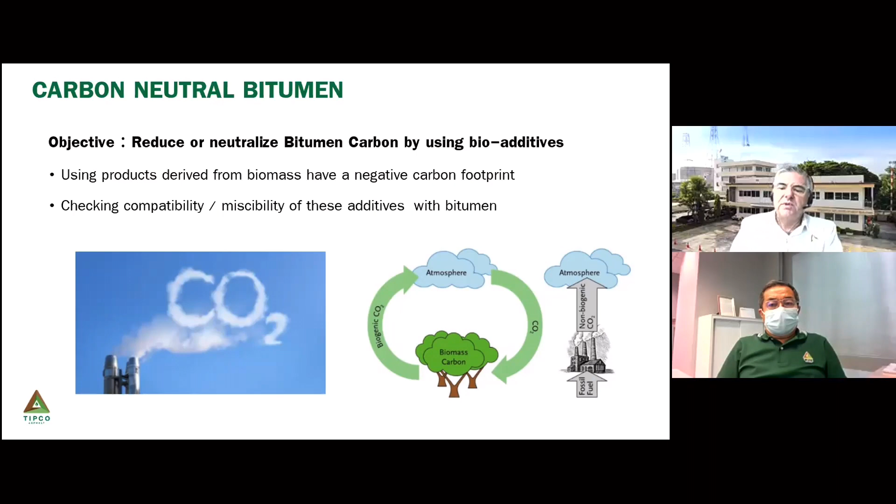So this is clearly an example of what we are looking for now: we know we can measure the carbon footprint of a product in kilograms of CO2 equivalent per ton. We know that after a life cycle analysis, and depending on the crude oil origin, bitumen can have a positive carbon footprint between 150 to 600 GWP.

Bioadditives coming from biomass origin, from tree or from vegetal, have a negative carbon footprint. So by blending these two products, we can neutralize the carbon footprint of the bitumen.

Sorry, there is a microphone open. Thank you. And even if we increase the percentage of the bioadditive, we can have a negative carbon binder.

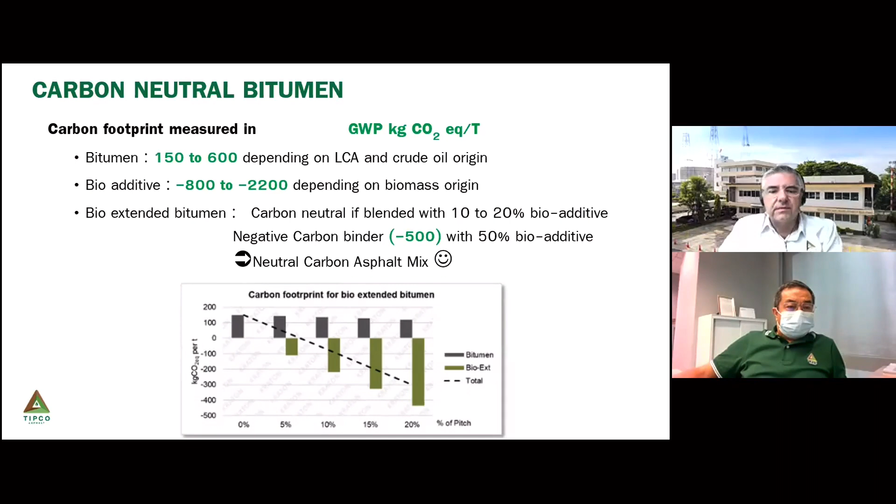This product has already been developed by some companies where we blend normal, or traditional, bitumen from fuel or petrol with some vegetal resin.

Depending on the additive used and depending on the penetration of the base bitumen, if you blend between 10 to 20% of this bioadditive with, for example, a 20-30 pen grade bitumen, you can obtain a 35-50 or 50-70 penetration grade bitumen. And the properties of the bitumen mean that it can work.

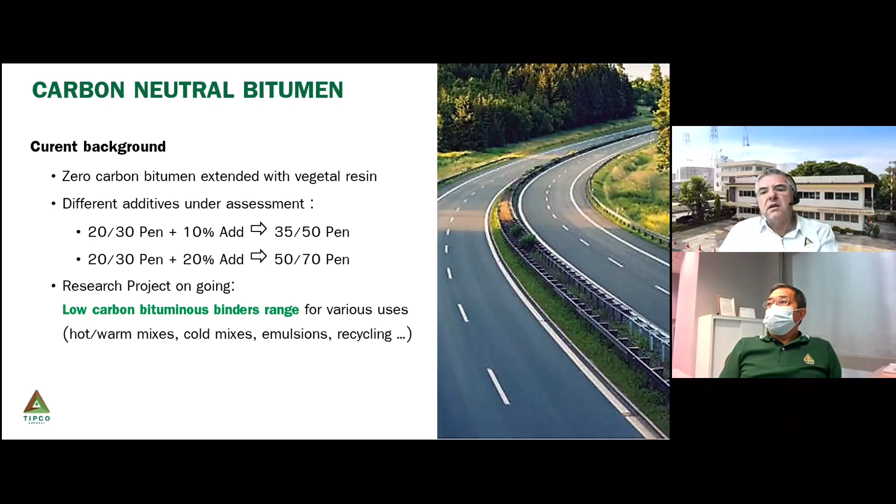Now the research and the next step on this product is to check the real properties of this modifying binder, because when you add this vegetal resin or this product from biomass, you have to check if you meet all the specifications and requirements of bitumen, especially viscosity, properties after aging, and long-term performance. So there is clearly still research ongoing on this product.

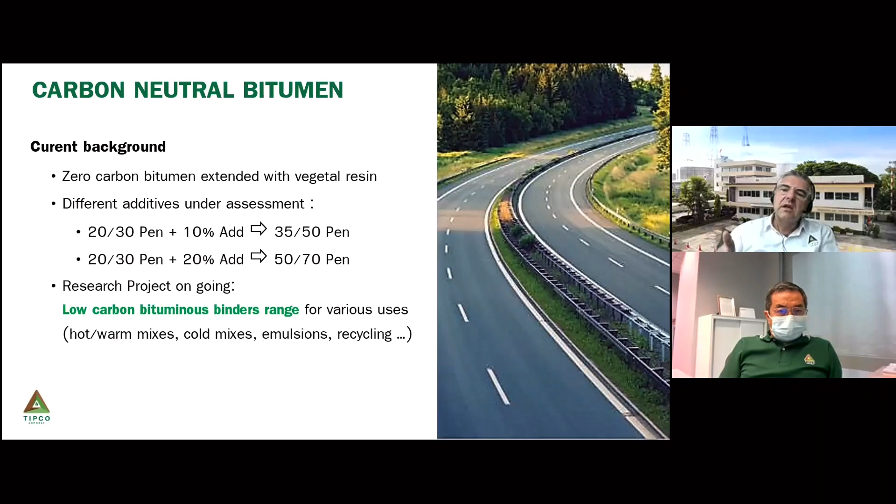And also how we can use this carbon neutral bitumen in all the various uses we have for bitumen, with compatibility with hot or warm mix, with cold mix, emulsions, recycling, etc.

If you push the logic of a zero carbon footprint binder, you can go to the ultimate step: to develop bitumen or binder coming exclusively from plants or from vegetal.

This is what we call biosource binder. This binder is made from raw materials coming exclusively from biomass and not from oil and petroleum. This binder already exists. It has been developed in Europe for many years now.

It acts as a carbon sink. In fact, the carbon footprint of the bitumen is negative because it's made from plants which absorb CO2 from the atmosphere. This binder, what is interesting with this binder, not bitumen, is that it's a clear binder.

You don't have a black component like the asphaltene we have in normal bitumen. It's a translucent binder which can be used to highlight the natural color of aggregates, or it can be used for colored product.

It has to be produced in dedicated plants because you have to blend the recipe, you have to blend some resin, some vegetable oils, some additive to obtain this bio-sourced binder. It can be the equivalent of the bio oil, biopetrol you put in your car.

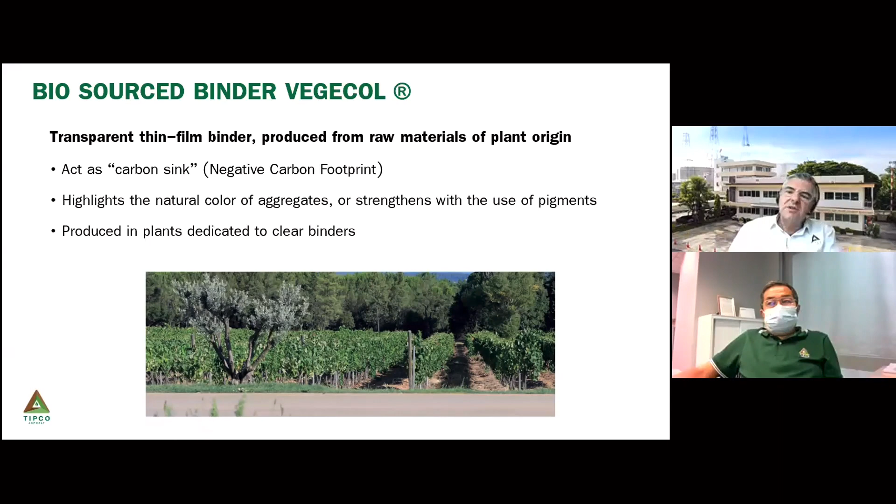This one is clearly a 100% plant-based binder. It has been used for various applications, more for aesthetic surfaces in urban environments or in architectural sites. As it's a translucent and transparent binder, if you put some pigment, you can color the mix too.

The performances of this binder are clearly equivalent to a standard bitumen, regarding penetration, softening point, aging, and it also shows good resistance to hydrocarbons.

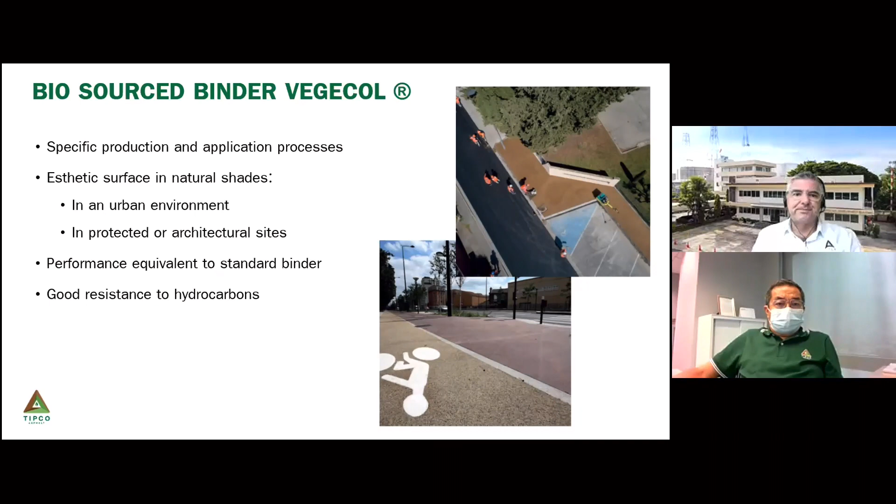The only thing, not a concern, but you have to be careful when you use this product, because as it's a clear binder, you have to clean all the production, transport, and application equipment.

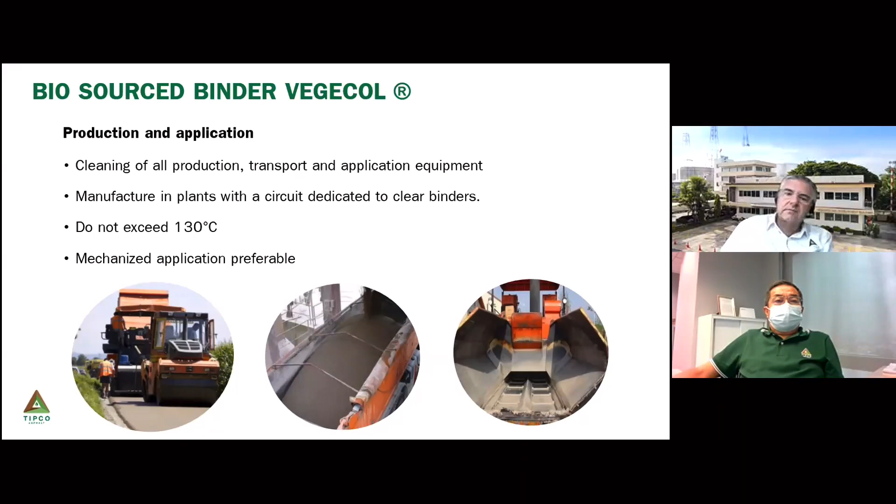If we continue to discuss sustainable binders, and from binders or products coming from biomass and from vegetal or from plant, we've also got, in the range of products, prime coats - what we call bio-based prime coat.

So you certainly know the traditional prime coat, EAP, emulsified asphalt prime, we use in Thailand. This prime coat is a traditional product used on gravel road, to spray, to waterproof a surface, to allow traffic during construction, and to have a better bonding between the gravel layer and the bituminous layers.

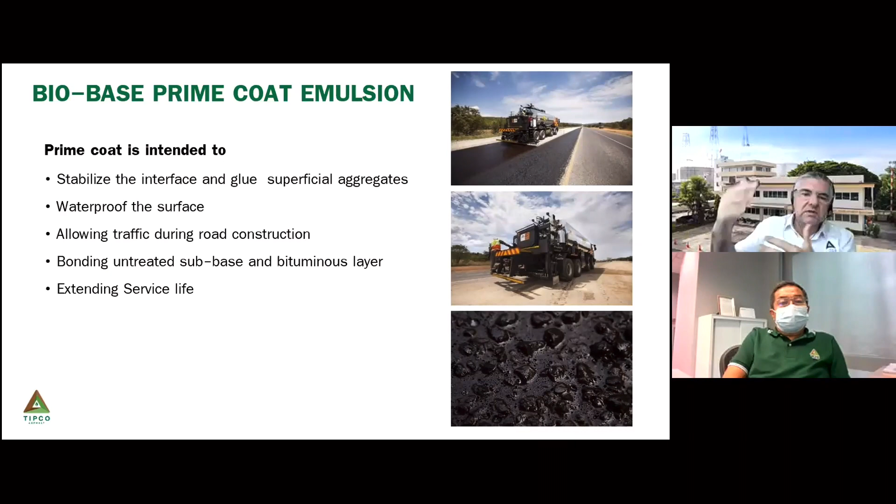We put on top the prime coat, so it's an emulsion product, a blend of bitumen, water, and solvent. Generally this solvent is a petroleum-based solvent, kerosene or diesel - coming from the fuel and petroleum and oil industry.

Now, we have developed some prime coat products using, not solvent, but fluxant coming from vegetal and especially from vegetable oil. This product has the same, even better, performances and properties than the traditional prime coat made with kerosene or petroleum solvent. It's clearly easy to use, it's the same process.

The clear advantages of this bio-based prime coat: it's non-flammable because you don't use petroleum solvent, so it's safer for manufacturing, production, storage, transportation, and spraying. And regarding the environment, you don't release VOCs into the atmosphere, and also you minimize carbon emissions, giving the product a very good carbon footprint.

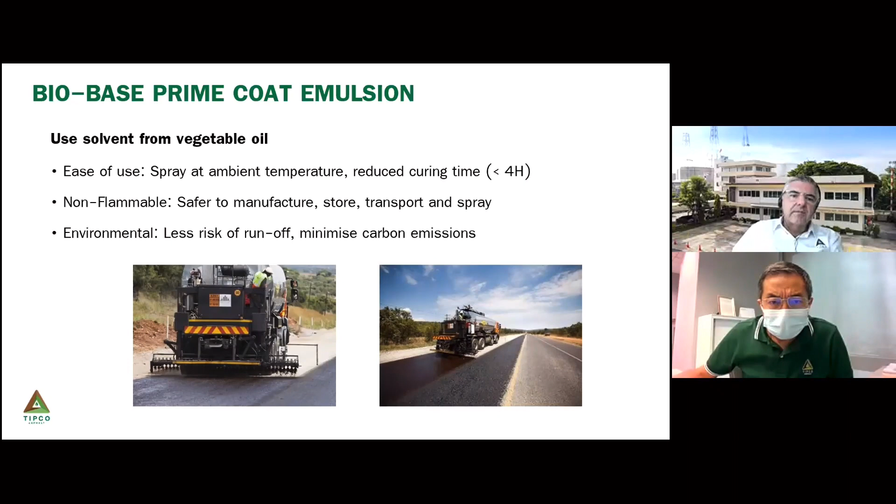When we evaluate this emulsified asphalt prime, or bio-based prime coat product, in the laboratory, we use the same process and same tests as for a traditional prime coat - especially what we call the penetration power test, where you put sand in a tube, then spray or drop the product at the top, and measure the penetration depth and the time it takes to penetrate the standardized sand.

As you can see in the picture from the lab, after 20 minutes, if we compare the normal traditional CSS1 - cationic slow setting emulsion - which we know doesn't penetrate very much and doesn't have very good priming power...

If we compare the bio-based prime and the standard prime, you can see in the middle that the prime coat with bio-based solvent has a better penetration depth after 20 minutes than the standard priming, and obviously even better than the normal CSS. What's also interesting with a bio-based prime coat product is that it dries faster too.

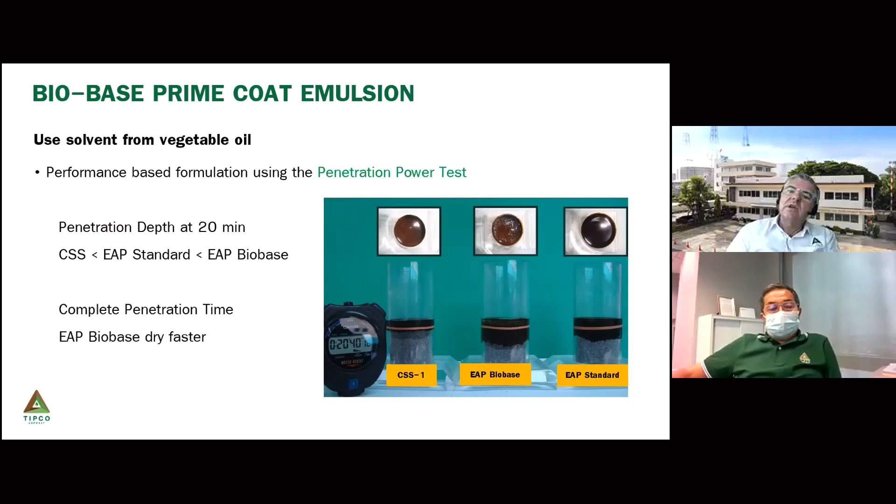So now, after talking about the binder, we will talk about the mixes, and especially, we know our industry, flexible pavement, uses hot mix asphalt. So by definition of hot, it means we have to heat our product, especially the binder, to have the correct viscosity to coat the aggregate, to have a workable product able to be spread and compacted on site in a nice layer.

So we know that by heating the product, we consume fuel and release greenhouse gas into the atmosphere. So the topic now, and the trick, is to reduce the mix temperature of the product we use in road and pavement construction. But if you reduce the temperature, you should not degrade the properties of your mix. You should keep, or at least even improve, the properties of your product.

So you see, the purpose first will be to use what we call warm mix. It's clearly not something new, something we developed maybe more than 10 years ago. But now, with all the environmental concern, it becomes more and more popular in a lot of countries. And the trend is clearly not to heat anymore at very high temperature, but to progressively switch to warm mix asphalt. There are a lot of benefits.

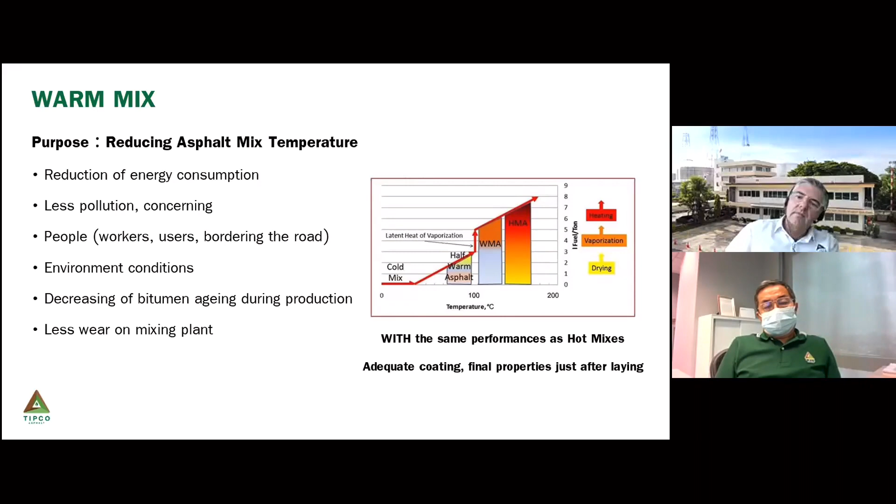So it's an improved technology, clearly efficient. By decreasing your hot mix temperature by 30 or 40 degrees, you will also have a good, positive effect on fume emissions from your mix. There are a lot of studies saying 50% less fumes for each 12 degree drop of temperature. It can be interesting with some sources of bitumen also, and you will reduce the emissions around your project, your work site.

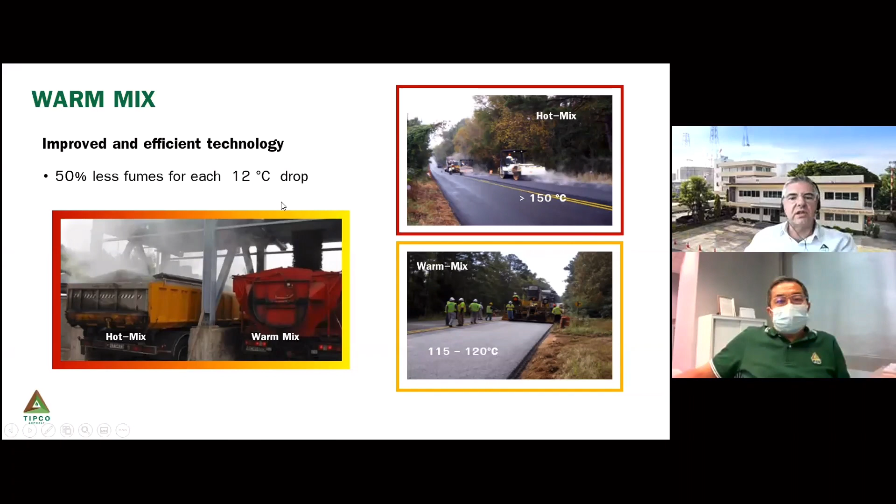There are different types of technology for warm mix, but the most used, I think, and most efficient, is clearly to use some chemical additives to add in your bitumen, in your binder. This liquid additive will help you reduce the mixing temperature by 30 to 40 degrees. You can see the table at the bottom of my slide.

For 60/70 penetration grade bitumen, the traditional grade we use in Thailand, the usual production temperature is between 150 to 160 degrees. With a warm mix additive, you will be able to reduce your production temperature to 125, 135 degrees. And for 40/50 grade, which has a usual production temperature higher than 60/70 because it's a harder, more viscous binder, the production temperature with additive will be around 140 degrees Celsius.

What's important to know is that these additives are what we call surfactants. They have no effect on the viscosity of bitumen—I will show you some laboratory results after. It just helps reduce the friction between the binder and the aggregate surface. So it helps, it's like a lubricant when you manufacture your mix in the hot mix plant, and it will clearly increase the workability of your mix, even at lower temperature.

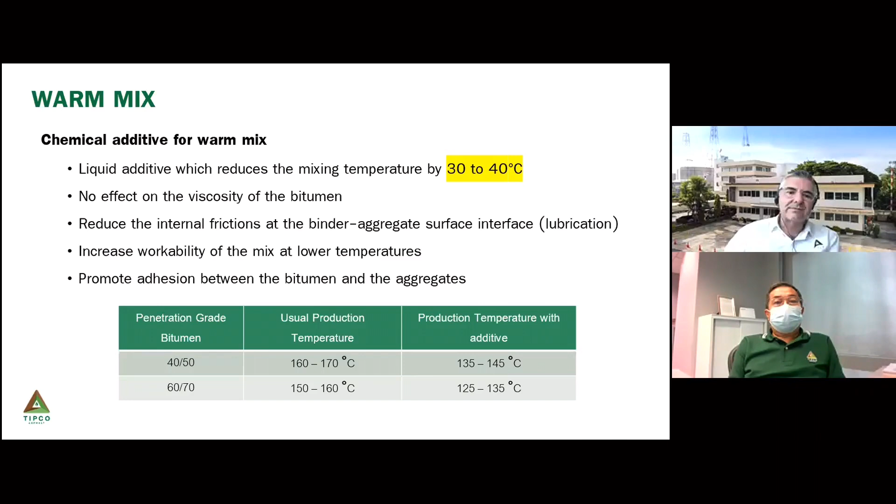How you add and introduce this additive into the bitumen is quite easy, but you have several methods at the plant to inject it. You can inject it in the bitumen line when you manufacture your mix, or you can add it in the bitumen tank. So these are clearly two different processes depending on the equipment you have in your hot mix plant.

This product is validated for all types of hot mix asphalt, all the conventional types, for base course, wearing course, even for hard grade, and even for PMA modified hot mix. What's interesting is the storage temperature - you can keep the product for 2 or 3 days and it will keep its efficiency in the bitumen.

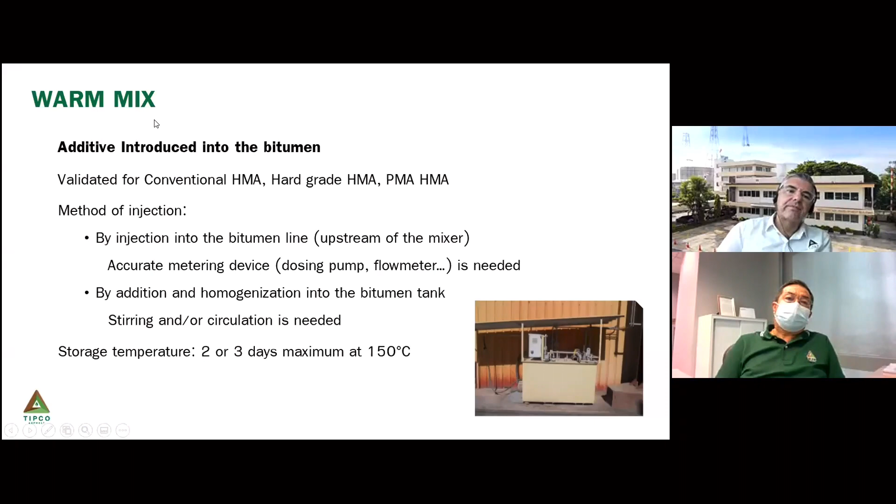So I was talking about laboratory study. The first result I want to show you is the bitumen viscosity with additive and without additive. You can see we measure the viscosity at different temperatures of a pure bitumen, a bitumen with additive 1 and additive 2. We tried two additives on the market at the same dosage, and there is absolutely no change in viscosity with this additive.

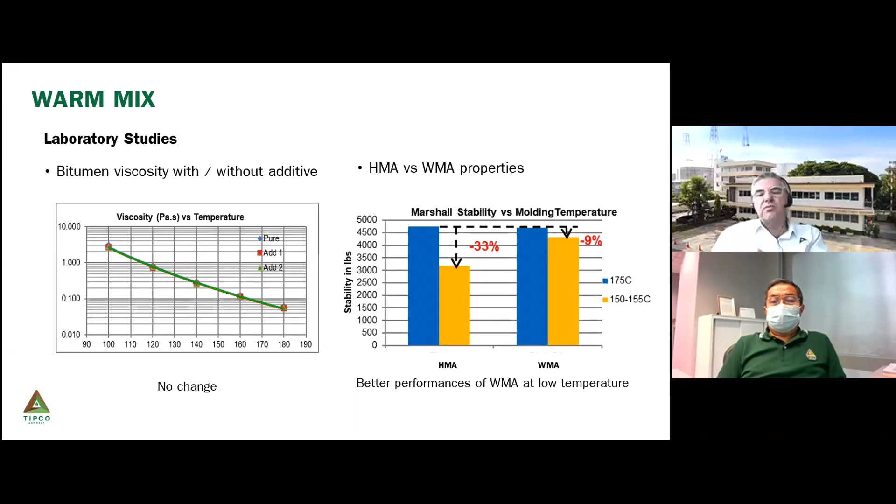But in the mix, when we use this bitumen with warm mix additive and measure the properties of hot mix asphalt compared to warm mix asphalt at different temperatures, we see we obtain better performances of the warm mix asphalt compared to the hot mix. Because you have a more dense, more workable product, lower voids, and as it also acts as an adhesion agent, you improve the resistance of your mix. So there is a lot of benefit to using warm mix.

You reduce the temperature, you consume less fuel, so you have a reduction in the cost of your hot mix. You reduce CO2 emissions, you reduce smoke and fume, and as you manufacture, produce, lay and compact the mix at a lower temperature, you're able to reopen to traffic quicker. So there are also these advantages, and you clearly improve the densification and density of your mix with this type of additive.

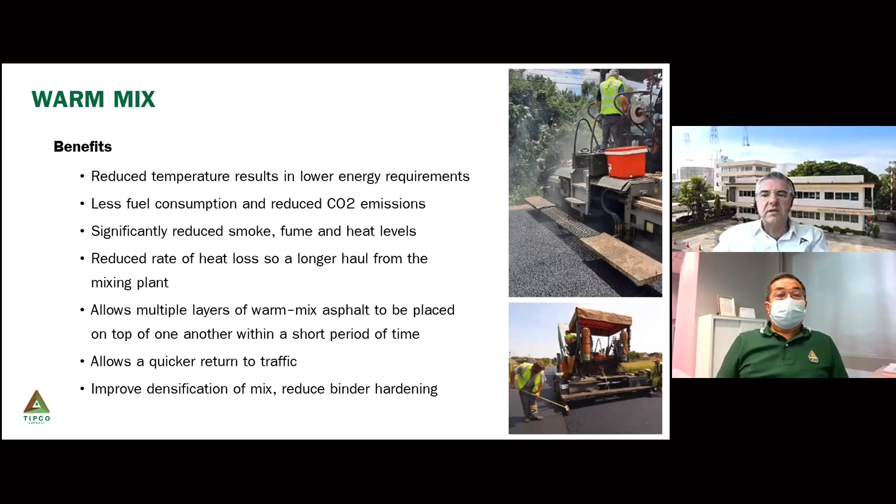After warm mix, you are still above 100 degrees Celsius. If you remember the graph in my introduction, this is the point where you have to heat your aggregates to eliminate the water in your aggregates and your mix. So you have to be above 100 degrees if you want a correct, workable, good coating between your aggregates and your bitumen, hot or warm.

If you are below 100 degrees, you change paradigm, you switch from the warm or hot technology to the cold technology. The cold technology is to manufacture mixes with emulsion - a blend of bitumen and water. So with emulsion, as you have water in the binder, you don't need to evaporate the water in your aggregate to have a correct coating. This is completely a different technology.

But cold mix is the ultimate product for low carbon, an ultimate low carbon solution I would say, because you don't heat your aggregate, you don't heat your binder, you manufacture and produce at ambient temperature. So you don't release greenhouse gas to produce your product.

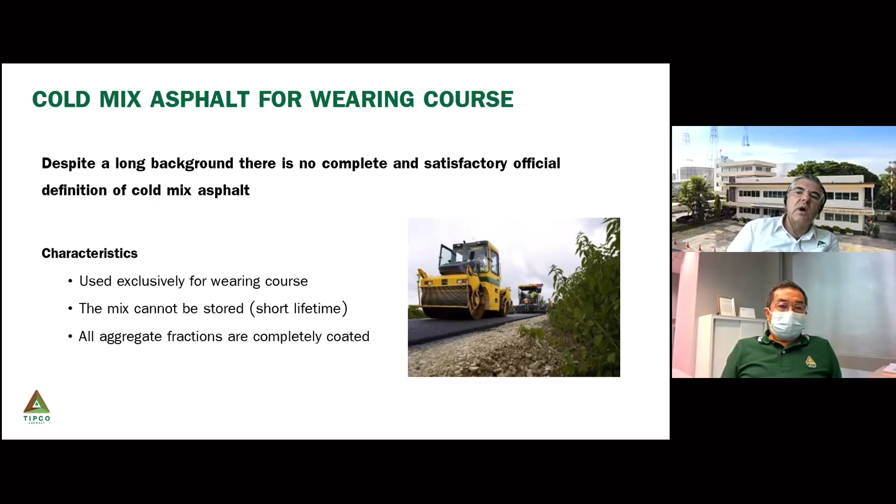And you would see why the dense is important. So dense graded cold mix, in fact, is just to show you that generally the cold mix we find on the market and the cold mix we find for patching, for example, are open graded cold mix. So it's a single size aggregate which is coated by emulsion and put back.

With a very high void content, generally around 20% of void in this mix, it's quite workable, but durability and the performances of this open graded cold mix are not very good or very satisfactory for medium-term or long-term performances.

So what we target here is to develop cold mix for wearing course and for, I would say, medium traffic, low to medium traffic pavements.

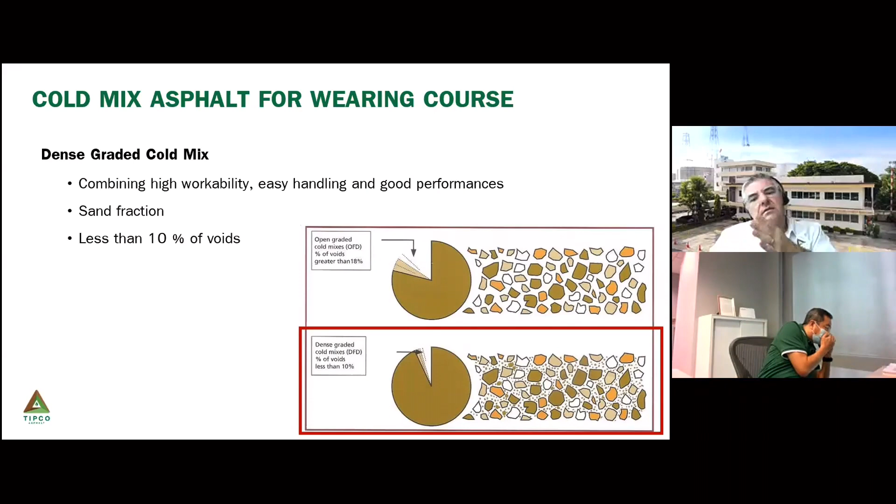This cold mix should be dense, so with a sand fraction. It's a blend of sand and coarse aggregates, highly workable with good performances, and with a low void content, less than 10%.

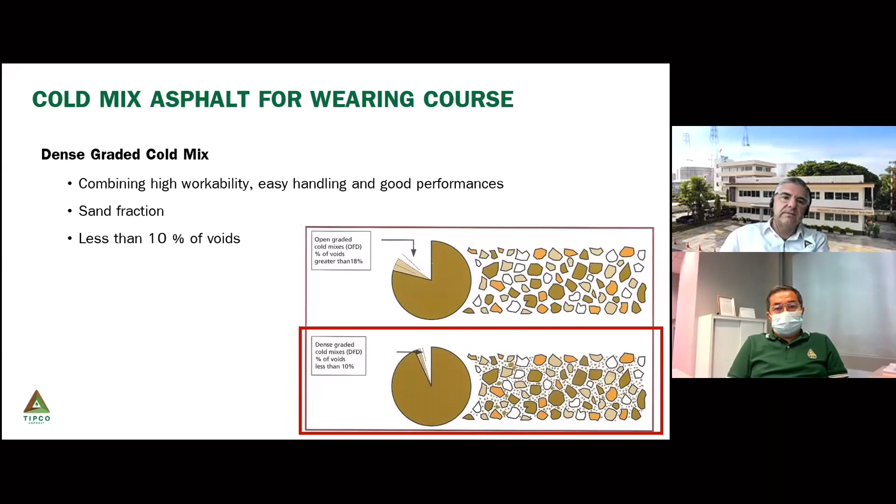The aggregates, so the composition of this cold mix, should not be too big in size, maximum 12.5 millimeters or half inch, and it should be very good quality aggregates with the same quality and characteristics as the aggregate we use for hot mixes.

And then we will have the binder, so it will be a bitumen emulsion, and generally it's a specific bitumen emulsion, specifically designed for the aggregate we will use, and we target a medium setting time.

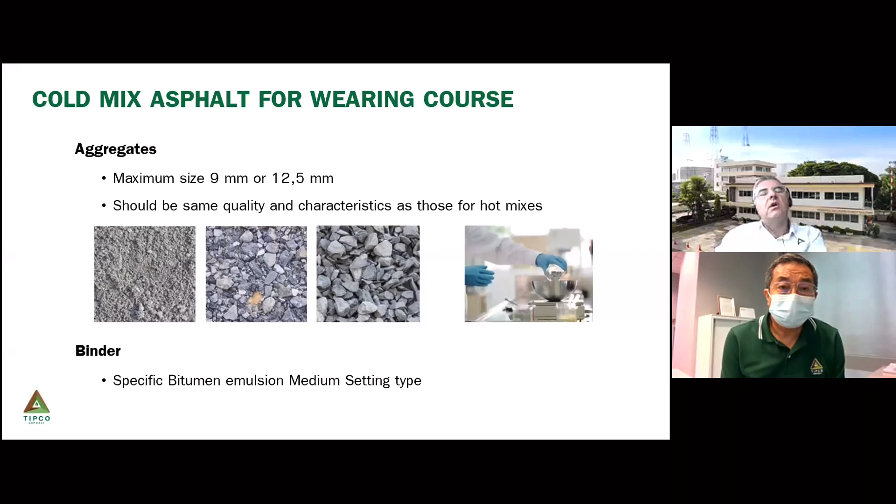Why? To have the time that the emulsion doesn't break when you mix with the aggregate. You need time to coat your aggregate correctly, and you need to keep the emulsion and the mix workable during the transportation time before you go on the site.

So there is a mix design procedure for this cold mix asphalt. You have to identify your aggregate, good mix proportion to target a grading curve, and the emulsion depending on the bitumen you have, the aggregate, the emulsifier. So you characterize and you design an emulsion.

You blend. The first step will be a coating visual appreciation, which checks the affinity of the emulsion with the aggregate you have. And then you can make some performance tests, Marshall stability or water resistance, the TSR test.

As you can see, we have made some tests with an open graded mix compared to a dense mix. Each time, the dense mix, because of its low void content and also specific formulation of the emulsion, achieves better performances than an open graded mix usually found on the market.

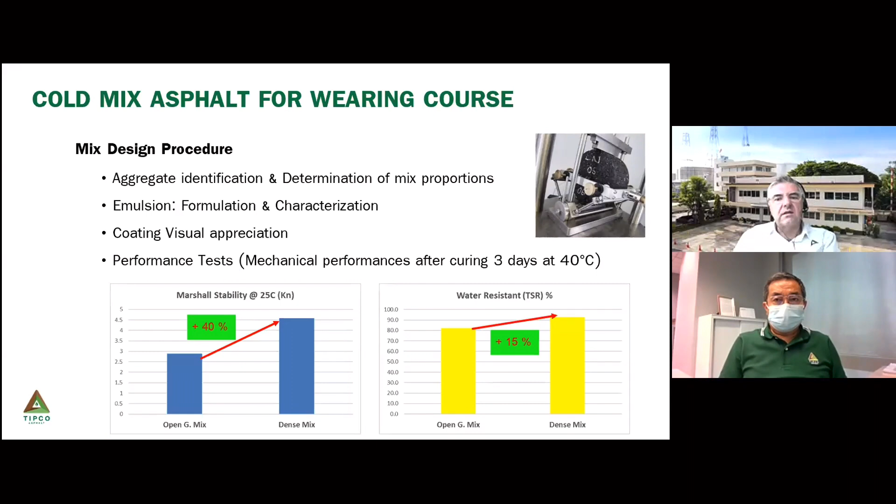All the trick with this dense mix is to have a good coating of your aggregates and to design a suitable emulsion which will not break immediately, because you will have sand, so you will have fines in your mix. So it's necessary to design a very specific emulsion.

This means that you will have a durable product able to resist to traffic, for light traffic or even medium traffic.

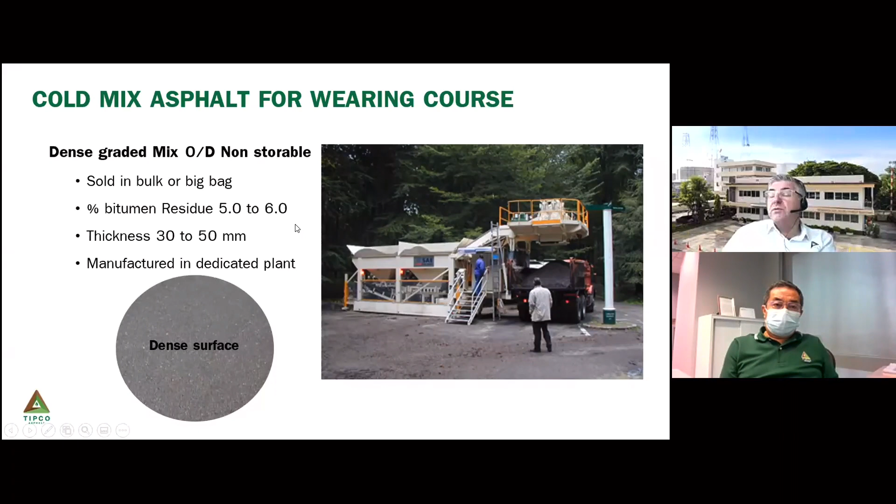So this product is clearly used in a lot of countries, in rural areas or even on very specific projects. It has to be laid clearly at ambient temperature.

So this is the advantage of this product, and it's laid with traditional equipment, paver or grader, and it has to be rolled and compacted with a traditional PTR or steel roller, depending on the equipment you have on your site.

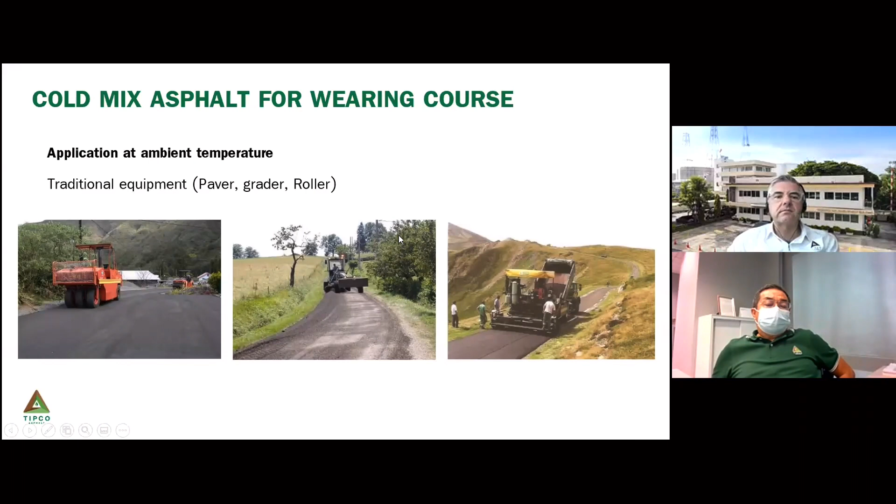So what I describe is dedicated to private small projects or projects in remote areas. If you have difficulties, if you don't have a hot mix plant, or if you have difficulties to supply material, you can transport the product for several hours.

So it is quite interesting compared to hot mix asphalt, where you produce your hot mix and the window to lay and to compact is generally narrow. So cold mix asphalt is a solution for that type of project.

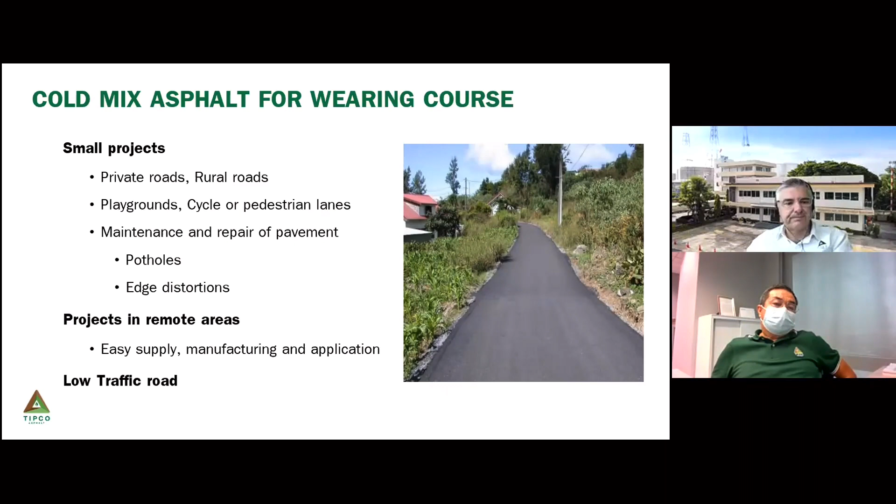Now the third type of solutions we have. So after discussing acting on the binder and acting on the temperature of the mix, now it's to recycle. By recycling, we will clearly reduce the impact of the works on the environment because we will use existing road, existing pavement, existing aggregates or binder mix which has been laid 10, 20 years ago. By recycling, we don't use new products, new aggregates or new binders, so we save a lot of energy and greenhouse gas effect because we did not transport new binder or new aggregate.

Recycling solutions have already been developed today, but you clearly know that in road construction there are two main types of recycling: in-plant recycling, when we mill a road and use the milled material, what we call the RAP, in new hot mix, and we blend this RAP in the hot mix plant.

On the other side, we've got in-place recycling, the in-situ recycling. I would differentiate two types: what we call FDR, full depth recycling, and cold in-place recycling. Full depth recycling is where we recycle the existing pavement structure on full depth, deeper than 150 or 200 millimeters. We are doing a structural refurbishment, recycling a deep and thick pavement.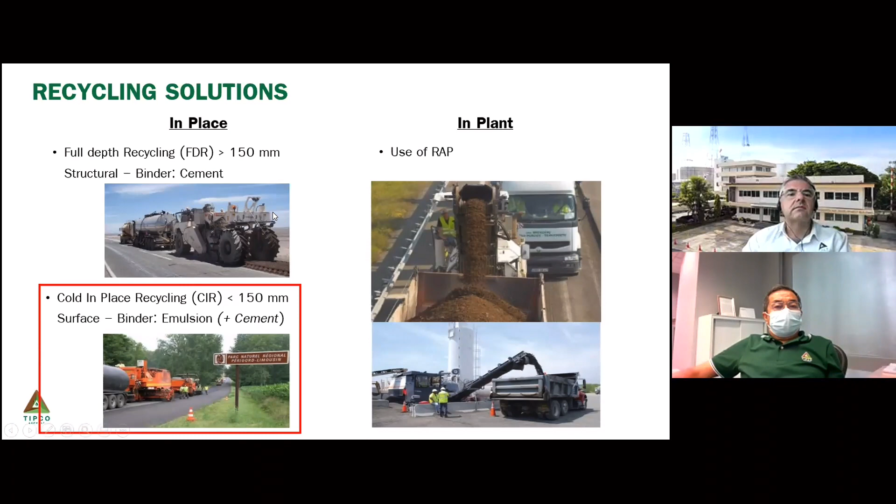So it's what I explained. Clearly, the topic and the purpose of this cold in-place recycling is to have an action on the top layers of existing pavement, and these layers should be 100% or a majority of old asphalt mix.

So instead of milling and removing this old asphalt mix to be used in a plant as RAP, we will reuse it on site. The problem with this old asphalt, as you can see in the picture, is generally it's an aged binder. You have a lot of cracks, potholes, alligator cracks, rutting. So the condition of this mix is bad, otherwise we wouldn't have to repair it.

So with the recycling machine, we will come and mill. To improve the characteristics of the existing RAP, we add specific emulsion, which will act as a regenerator, or not really a regenerator, but as a new binder, improving the characteristics of the existing road materials. You can see the whole recycling train here. Behind the recycle machine, what is nice is you get a ready-to-pave product. You compact it, and you have a new layer, a new binder course, which can afterward be overlaid with a new wearing course.

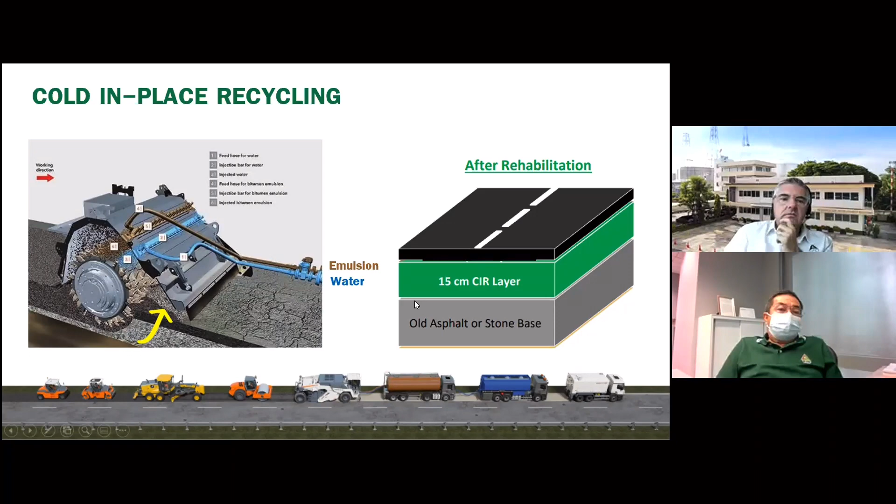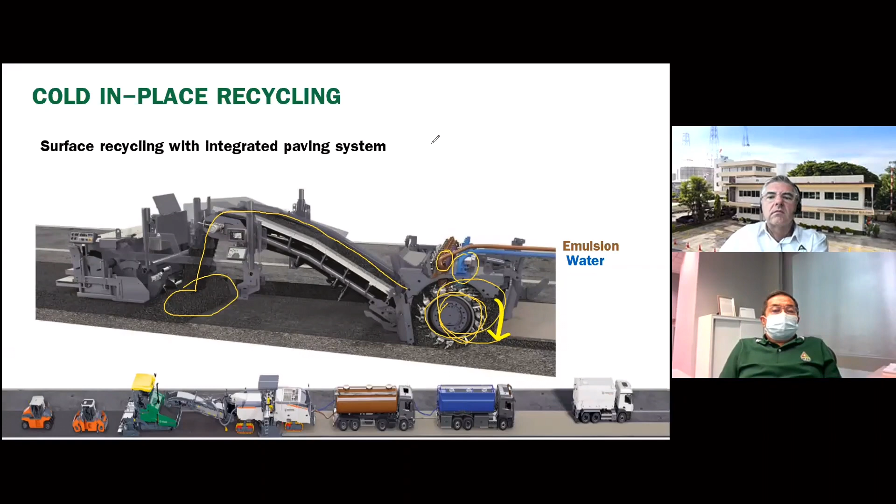So, more detail on the recycling process: the machine has an integrated paving system. What's nice is that you mill - you can see here the milling process - then the existing RAP goes on that conveyor, and then you inject emulsion and water, and then your new mix is directly paved as a new layer, and then you just have to compact it.

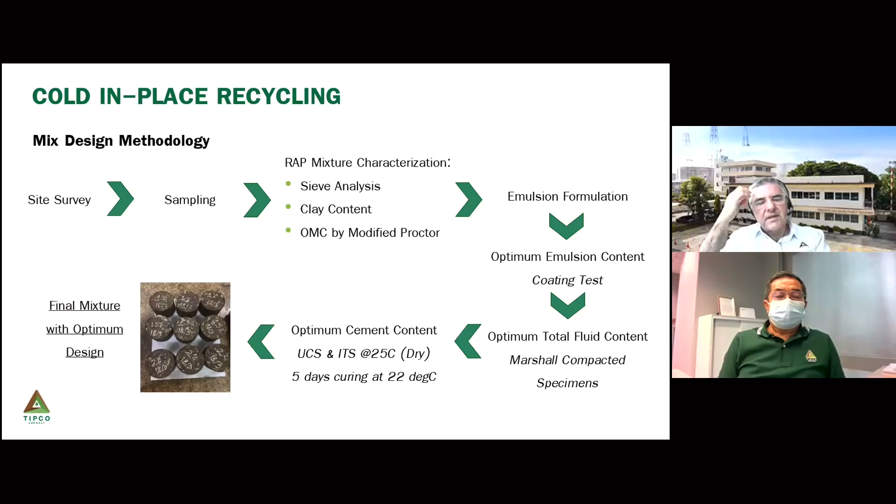So before going into a cold in-place recycling project, you will have some lab study to perform, and there is clearly a methodology to follow. There are a lot of technical guides now dealing with cold in-place recycling projects, especially in the US, Europe, Australia, and South Africa, and the methodology is almost the same for all these countries.

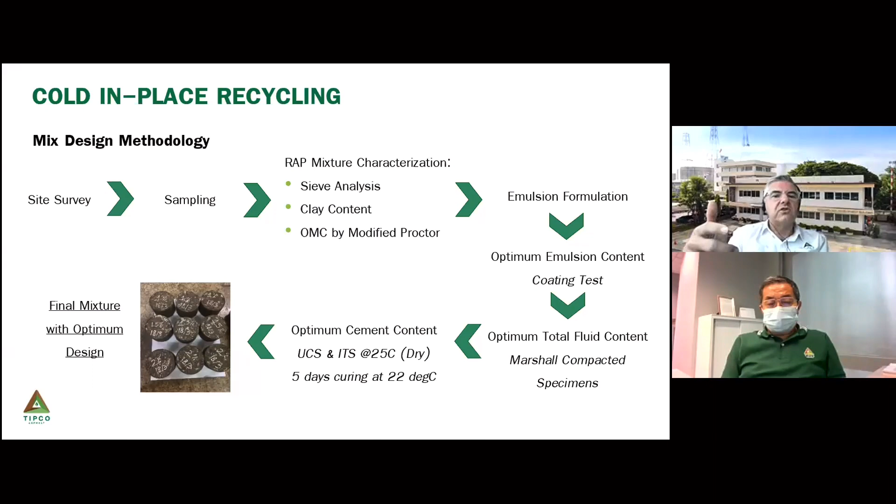First, you will have to make a site survey. What is the condition of the existing road? What is the thickness of the existing pavement, and how many millimeters of hot mix can I recycle? Then you take some samples of this mixture and analyze it in the lab: the sieve analysis for sure, the binder content, the clay content, whether we have a clean product or not, because it will have an influence on the emulsion formulation and emulsion design.

Then you will have to find the optimum emulsion formulation with the correct emulsifier to have a good coating of your existing product, and the optimum emulsion content will have to be designed in lab according to performance tests.

So you will compact specimens in a Marshall mold, cure them, and generally we make two types of tests: a UCS, so an unconfined compressive strength, or an ITS. And it's just after this test that we make the final design of the mixture.

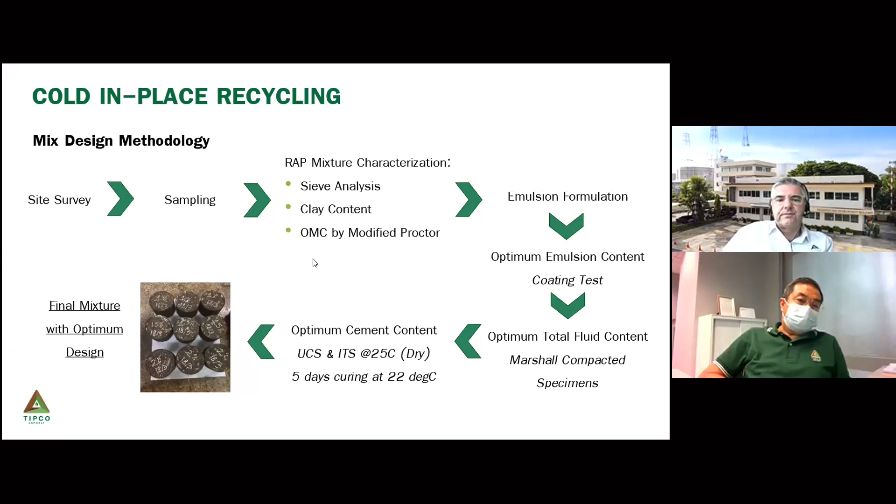So this is an example of a case study we have done on a cold in-place recycling project. With usual specs, depending on the country where you are or the project, some consultants will give you specifications regarding the compressive strength, the deformation, or the ITS value. But this is the traditional value we find in the guide.

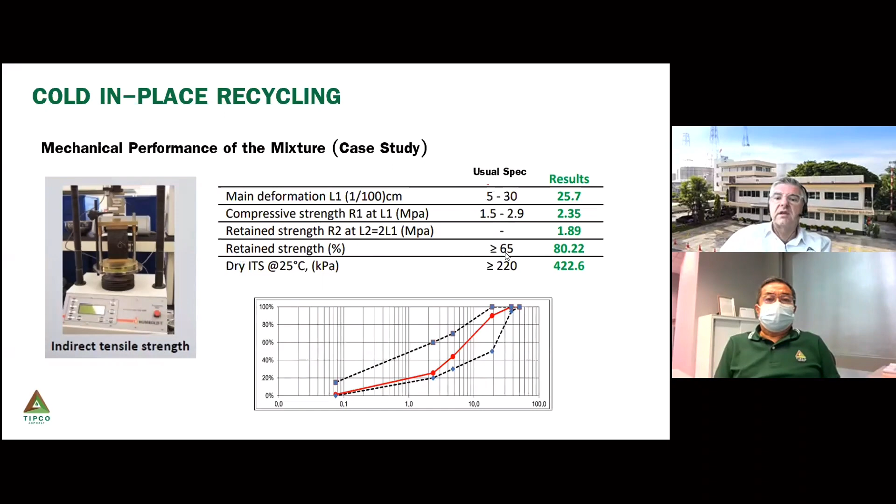So what we target, for sure, is a good TSR, so retained strength after immersion, a good dry ITS, and some compressive strength, between around 2 megapascals.

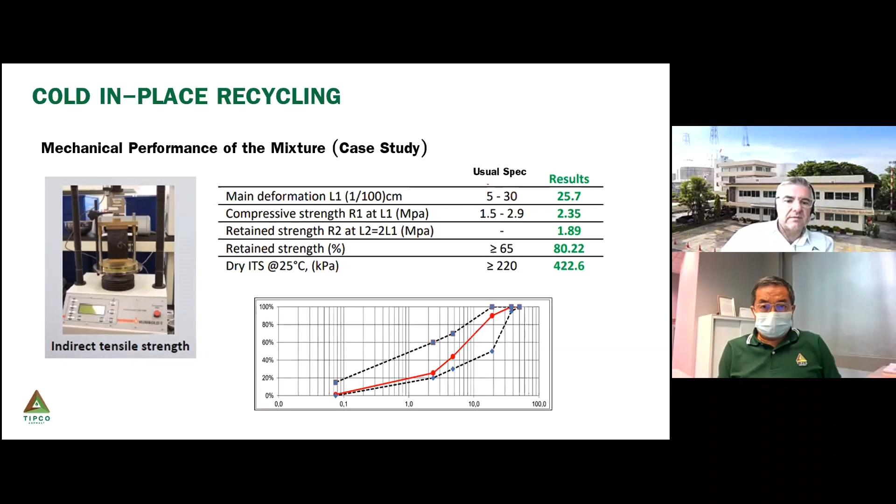Then you will have a curing time, because with the emulsion it will have to set and cure. So generally, if you want to reopen to traffic your layer, you will have to protect it with a cure coat, a coating. Generally it's a prime coat, or a single CRS or CSS prime coat, and a chip.

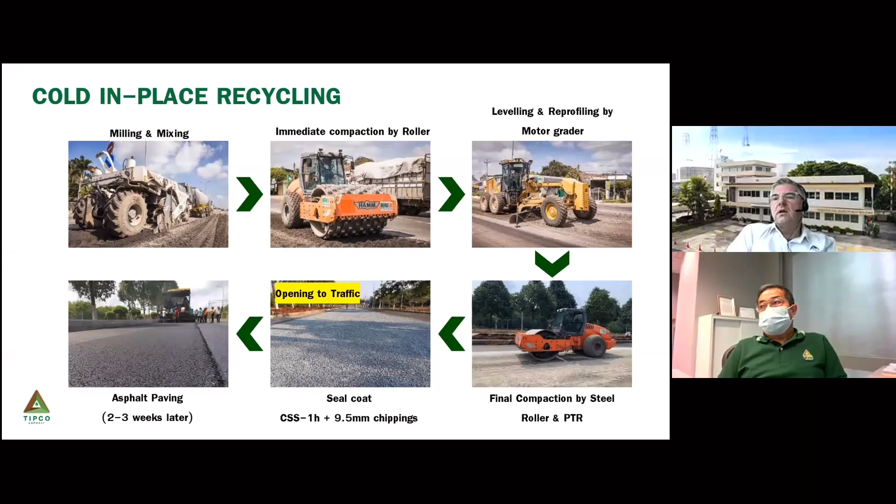And after curing, you can pave with a new wearing course. Depending on the project and the traffic, that could be a micro surfacing, a thin asphalt wearing course, or a thick asphalt wearing course.

So this technique of cold in-place recycling, compared to the traditional solution of milling and filling, even if you reuse the RAP in the new hot mix, is clearly cheaper than the traditional mill and fill, because you don't have all the transportation of the milled product. You reuse everything in place. The only new material you import to the project is the emulsion and some water.

So you reuse all the materials in place, making savings on purchase, on excavation, on number of trucks, all like that. So clearly for a contractor and for the owner, it's clearly a cost-effective solution and a cheaper solution.

Regarding the environment, you reduce your greenhouse gas emissions and fuel consumption, because you have less machinery and less transportation.

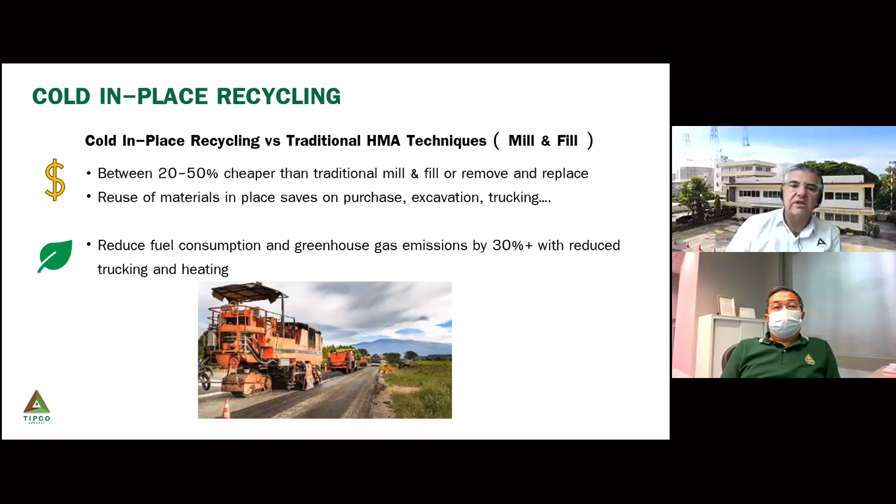This is an example of a life cycle analysis calculation, using a software we call SEVE. It's a life cycle analysis software developed in Europe where you can assess all the greenhouse gas and energy consumption of a project, from the extraction of materials to the implementation and laying. You take into account all the stages of your project, all the energy used, and all the CO2 emitted during the project.

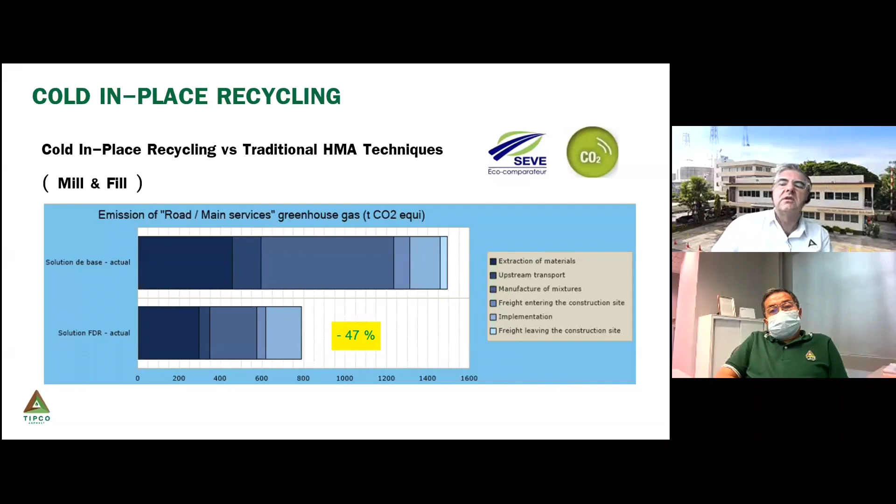If we make a calculation for what we call the traditional mill and fill project, where you mill, evacuate the RAP, bring new material, and pave hot generally, and compare it with cold in-place recycling, you clearly reduce your CO2 emissions by almost half. This is an example on a specific project; on another project it could be 30% or 35%, but clearly there is a reduction in greenhouse gas emissions. So we are in a 100% low carbon solution.

If we continue with all the advantages of the cold-in-place recycling technique: you reuse 100% of existing materials, so this is a fully recycled project. You can reopen to traffic, saving time and delay, generally shorter than a traditional solution. And at the end, you have structural values similar to what we can have with hot mix. As it's a cold process, you also increase the safety of the crew and everything.

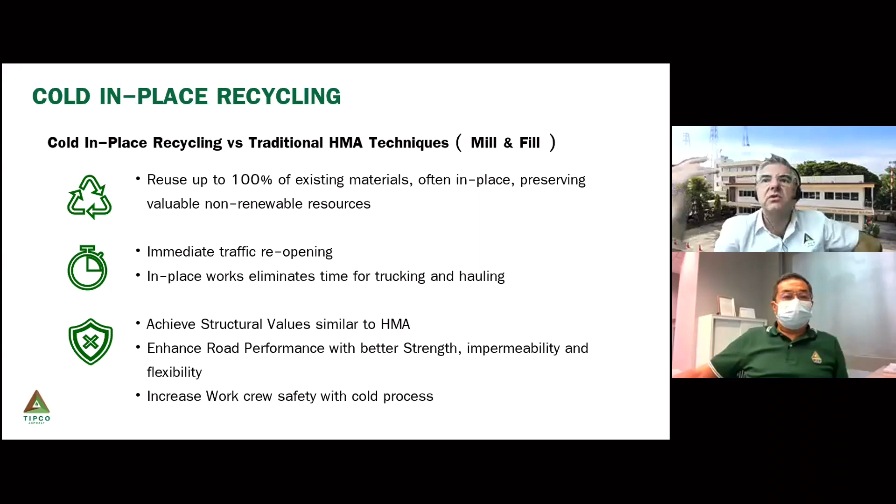These technologies and processes are clearly now the trend in a lot of countries, because you save time, you save money, and you are clearly in this sustainable policy in road construction. So to conclude, this is the end.

So clearly now, what we focus on, in TIPCO Asphalt, in Colas Group, and everywhere in the world, is that innovation must be clearly driven by the promotion of sustainable solutions. We have no choice. It's now, and it is also the duty of a road construction company and all the people working in this industry.

So the three main solutions and research axes we have now: first, clearly to find alternative sources for binder. We know that one day it will be more and more difficult to have access to crude oil, so we have to find alternative sources of binder to build our roads.

We have clearly to promote solutions with production temperature at a lower level. So we have to reduce our energy consumption and we have to produce with lower energy.

And as we know, and that is not as well known by the public, I think, asphalt is clearly a material that can be 100% recyclable. It's not the case of a lot of materials in the industry, but yes, we know that we can recycle asphalt 100%, and we have a lot of solutions for how to recycle this asphalt.

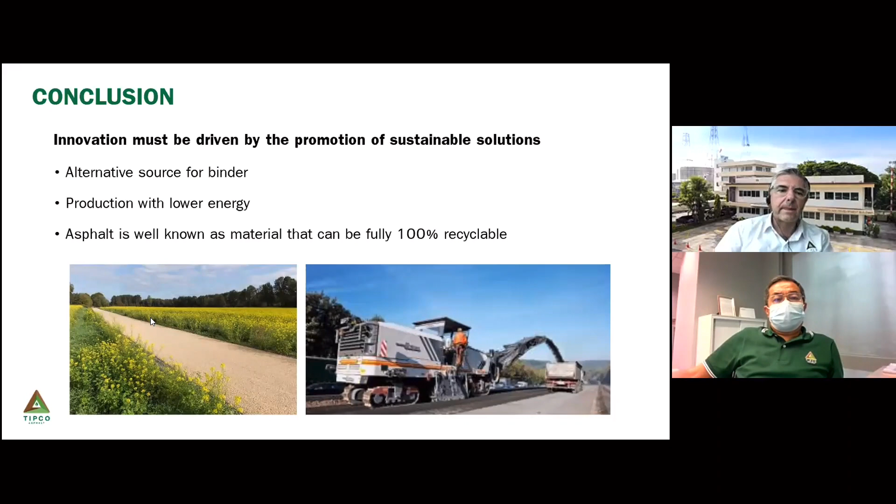So as former President Obama says, if you want to prevent the worst effects of climate change before it's too late, the time to act is now. Thank you for your attention.